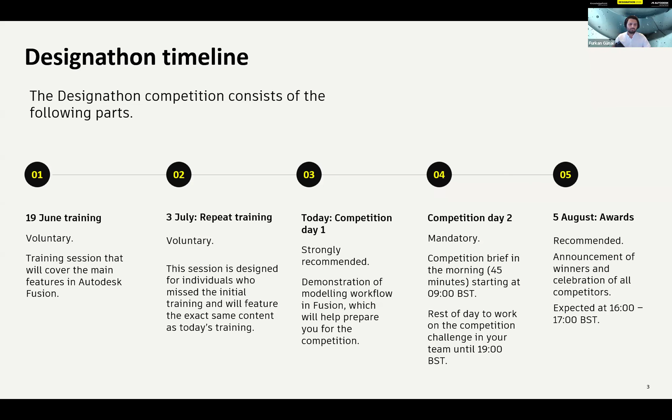After that, finally on the 5th of August, we will gather for the award ceremony and celebrate your amazing projects and announce the winners. So that's also one of the important days of the Designathon.

During the competition, we want to make sure you feel fully supported, so we are using several platforms. Discord is one, and I see most of you have already joined and been assigned to your private team channels. In these channels you can text, voice call, and share your screen with your teammates. The main purpose of Discord is to make it easier for you to collaborate with your teammates.

Other than collaborating with your teammates, please keep an eye on the announcement channel and support channel, because we will be sharing information and making our announcements through these channels. So please keep an eye on these as well.

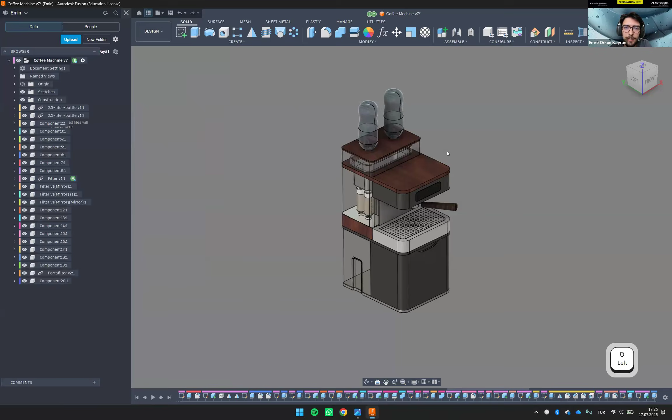If you take a look at it quickly, the models here might look similar because just a moment ago it's been shown to you. I will be using this as well by importing our main design, and the rest will be just basically designing from bottom to top design principle.

You don't have to stick very strictly to the design principles. You can just improvise. You're not expected to be very tidy with good product data management—you can just improvise on your own modeling.

Okay, so I will create a new design over here. For this one, I will be choosing hybrid design, where we're going to put a lot of components and combine all of them in just one model. That's why I'll be needing hybrid design, so I recommend you choose this tomorrow as well.

So we're going to create a new one, and we have—okay, let me open my grid. We have a blank design over here. The first thing I'll do is import the bottle design. You can go over here and open the data panel.

Then I will find the bottle design that we created before the session. You can either import and insert it from here as a derive, but the quick method is just to drag it—find it on your data panel and just drag it onto your design. This way, it's going to open over here.

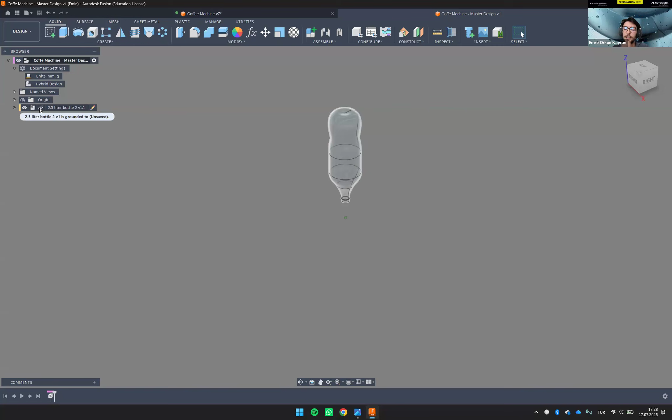Instead of doing this, I'll move it slightly to one side, then I can mirror it to the other side. You can see the icon over here with the chain—that means it's actually connected with the original design. But I'm not going to break it, I just want to move it.

So this is grounded right now, I need to move it. So I right click on that component and say unground from parent so I can move it. Right now we can see it's easily moving, but this isn't good because we need an exact position, right? Let me show you easily with that, where we're looking at.

So I'll again select Move Copy Tool, and change my object type to components since this is a component. It's good to select just one identical object over here and set your move type as free move—you can select the other ones either, that's fine, but for now it's easy to rotate and change around. I'll just slightly move it to one side, maybe 125. It's okay, then I say okay.

The next thing I can do is mirror it quickly so I can see the proportion and the overall design height. Okay, so it asks if I need to capture the position right now, because we've changed the position and it's not being saved over here. I say capture position—if you say revert position, it puts it back to the initial position, but we don't need this.

So basically, I will just cancel this. I say capture position. Once you do it, you're going to see in your timeline that a new icon has been created. This indicates basically that the position is being captured over here. Okay, so you can select components or bodies. If you say bodies, the same body will be stacked under the same folder, but I want components because I'm doing it one by one with each component.

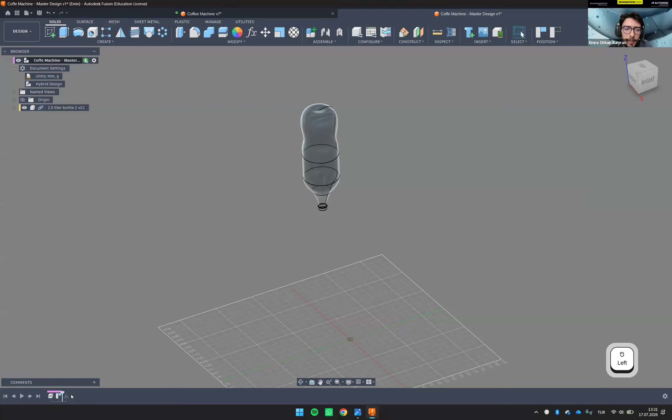All right, before you do this, I will just move it again. Select the object that you want to move. It was 150, I think, so I will just move it 50 millimeters. And then I will go over here. But I made a mistake over here again, because I should have captured the position, because it moves it back. Okay, let's do it again.

50. Then you see here the capture position icon. So that actually fixed my position. Now move it back. There we go. Okay, so the position looks okay. Quite nice. And the next thing will be basically just starting from the top and going until the bottom of the object. So there's a lid over here on the top, which I think puts the bottles in position.

To start with that, you can either create a plane, a construction plane that helps you to create your first sketch, or you can find a flat surface here where you can actually create the sketch and start with it. So for now, I will just hide my grid and zoom in, then you can actually find here there are some flat surfaces you can use. It's definitely up to you, but for now, since we're going to design it on a good principle, I'm going to use an offset plane.

And I will select one of those planes. It doesn't matter which one you're selecting. And then I will drag it up until I'm happy with the result. I think we can stop at 50. That's fine. Then that's going to be the helper plane, basically, an arbitrary plane we can use to create a sketch. Then I select it, and we will hit the create sketch button.

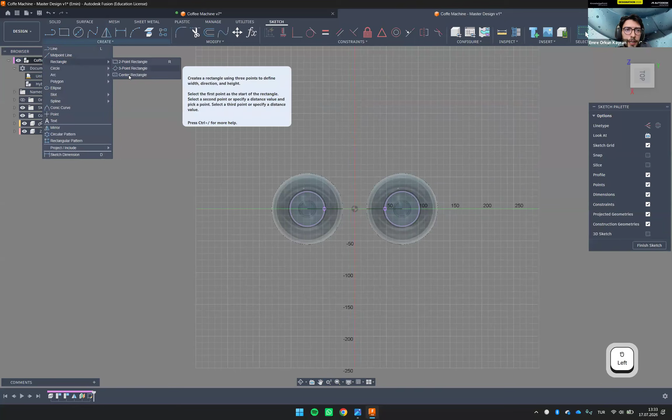So let's go to the rectangle and center rectangle. So let's make a rectangle something like this. Then I press D on my keyboard, or you can select it from here. That's going to give me a dimension tool. You can say maybe 320 by 180. Okay, that looks okay. Then we finish the sketch.

And you can see that the proportion is a bit different than ours, but it's fine. We don't have to stick exactly to this, because we did a similar one here. As you can see, this one is bigger also, but I'm just improvising and trying to show you how we can do it without any dimension or any reference image. You have to imagine it. So that's what I'm doing right now. Okay, anytime we can go back and change the sketch over here. Okay, let's go and say extrude.

I will give it a bit of thickness. 10 might be too big, maybe 5 is okay. And on the operation, instead of saying new body, I will be selecting new component this time. Okay, so each one is going to be stacked as components. I hit OK, and there we go. So we have a good surface here.

So to put it in a good shape, I will just add a chamfer here, maybe like 2 millimeters, so that we have a good inset over there. Cool. Okay, the next thing might be creating this glass, the plastic part that covers the whole body. So before I do it, I want to add some fillet in the corners. Over here, I'm just selecting them one by one, and you can apply it as you wish. I think 25 looks fine right now.

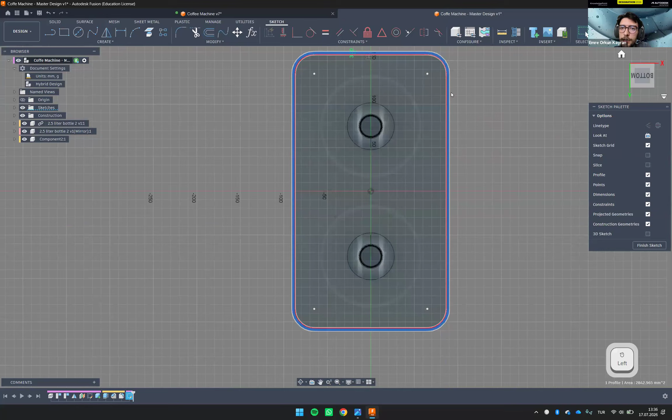Since the outer surface has already been defined, I don't have to project it because I created the sketch on the same surface. Then I press Finish Sketch. After that, all we have to do is just extrude it again. So you might wonder why I did it in 2 steps, because I want to create this as a new component. So we can keep it, I think, in 100.

Okay, to see through this object, you can easily go to the component. You can rename the components right now, but since we will have a bunch of different components, we can just leave it like that. But in your design, just to give a reference to your friends, to your teammates, you can just rename them. If you want to rename it, just right click on that and say rename. But for now, instead of doing this, we will change the opacity to maybe like 50% so that we can see through. This is not a material, okay? This is just an inspection tool for us.

Okay, so to put this one in a good shape, I'm going to make a lip that goes inside so that it's going to be more realistic. That's why I will create another sketch here. But this time, instead of giving the offset from the defined object, I'd like to show you something new, which we covered a lot in our previous sessions, the project tool. And I will be selecting the edges that I see here. So that's going to give me a 2D projection. Okay, so this is defined. Even though you hide your active component, you can see it there, which is very nice.

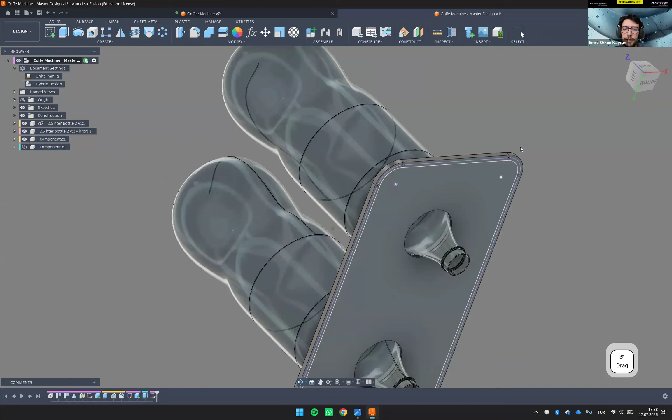And then I will offset this inside, like this, maybe, this is not minus, you can say 3. That defines the thickness of the lip. Then I finish sketch, then we can quickly extrude it. Okay. As you can see, it's more realistic right now. In real life, of course, you need to bring a bit of gap, but you can do it in your design as well. So this part is done. Let's check what we can do next.

Okay, we have a bucket here. I think it is basically to collect the dirty water from top and bring it to the filters. And also here, I think we have the pressure chamber, which basically pressurizes the water and puts it onto the espresso machine, which is the portafilter. We don't have to do the inside. We will just bring it as a solid part. But we have a wooden shape over there. It's basically connecting the bottom and top part together. So we can create it first.

Let's do it. I will create the sketch again. Once you find a clear surface, a flat surface also, you're good to create a sketch. This one is a good example for this. Then I select Create Sketch. There we go. And the next thing I will do will be, I will just continue on one of these vertices over here and just make a rectangle.

You can use the mirror tool over there, but I'd like to show you the constraints in Fusion. Remember to select the correct edges. So just to check this, you can rotate your camera and you can see that I picked the wrong one here. And I picked the wrong one here as well.

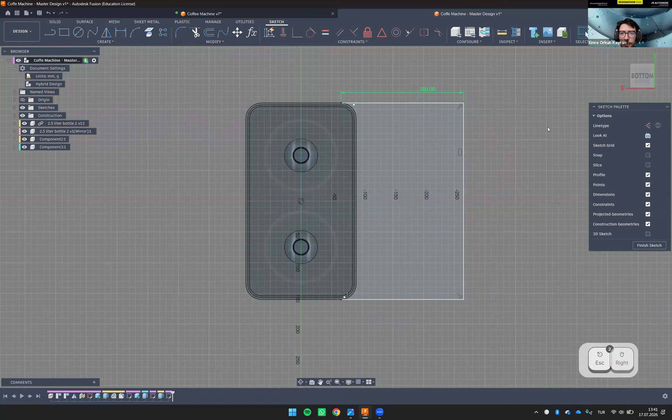So the first part will be selecting the perpendicular constraints for the corners. And lastly, we can give dimension. I press D on my keyboard and we can give maybe like 200. If the proportion is not good, we can always go back and change it. I think that's all. So I don't have to do anything here because I already have a defined plane. If you can see, when I hover my mouse there, it highlights the plane that I can extrude.

So I finish sketch, then I hit E on my keyboard. It's a shortcut for extrude. Then I will select both of them. Then we can convert it to solid. But instead of operation join, you need to select new component again. Okay, so that's good. We have the second part. And lastly, I will add a fillet here. Okay, let's keep it at 30. Cool. So far so good.

I think the next part might be this extra plastic part inside. I think that holds the tip of the bottles so that it stays in the correct place. So as you can see, that's a design challenge for us because our rotation is limited. Also, the manipulation tools are not very good here at this moment, but we can quickly fix it. We have a bunch of different methods to get through this issue.

You can either hide this component and create a sketch in 3D view. That's another method. But for now, I will just do it by creating a sketch in the plane that I want to create it in. Then I will go over it. So anytime, feel free to hide your bodies or change the opacity to see your image clearly. Okay, let's create a sketch here. You can see it's very difficult for me to see something from there. That's why I rotate my camera with my right click, and there I am.

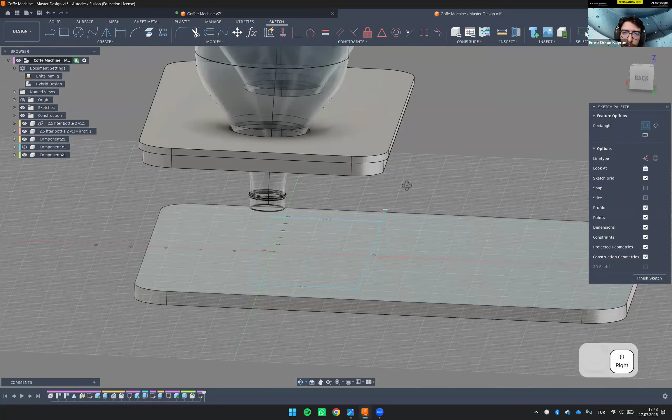Another issue is I don't know the border, right? If I create a rectangle here, just for reference, I don't know if it's connecting the border or not. I have no idea where it is. The first method is to just measure it and give dimension, but that's going to take a lot of time. The second one is to turn on the visibility of this component and take a reference from here, which I think is very useful. So go to create and select project include, project.

Okay, another hidden tool in Fusion which I really like to use. If you select this, you're going to see that it selects the plane closest to your cursor. But instead, I want to select the one inside. There's a very quick way to do it. Just press and hold your left click button, and you're going to see another feature here, which lets you see through. The second one is the face I'm looking for. So I click on that, then I hit OK. There we go. Now I have the reference. Okay, perfect.

So from here, we can just make a mirror line. Then I can make this a construction line so it's not going to affect my design. Honestly, right now I can also remove this so that I only see my reference images. I don't have to use all of them. I can just create one simple line so that it covers my bottles. Then I put this maybe like 130. The distance between the origin and the top flat surface is going to be maybe 120. But make sure that you connect these two.

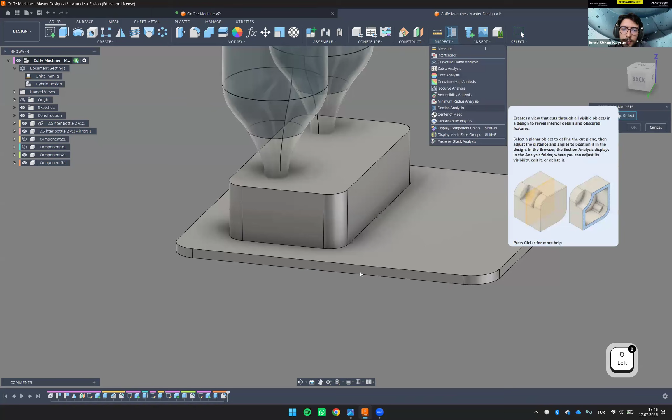Okay, let's drag it again. 20. So from now on, a lot of people have difficulties understanding why we did this. It's completely solid. If you want to check whether the inside is filled with material or not, you can go under Inspect and select Section Analysis. Then you can drag it and you can see it's completely filled with solid.

But the reason that I wanted to do this is I'm going to use a different command named shell. I go under Modify and I select Shell. Select the face where you want to create an opening. This one is the case. You can put here 2 millimeters, and there we go. I think at this moment, it's good to change the extrusion until the other side. I double click on the extrusion icon here so that I can edit it. Then here is okay.

Lastly, we will create the holes for the bottles. Then I press create sketch. I don't have to identify the circles again. I encourage you to use the project tool. Select the most outer edge you see here. Finish sketch, and then let's find our bodies. I hit extrude and quickly select it from there. Then I'm going to cut it.

But this is also cutting my bottles, so you can see that 2 of my bottles have been cut. But you can change the selection by changing the objects to cut, and you can disable body 2.5 liter. Okay, so we have the openings. The water can fill up here. Again, I will change the opacity for this. It's 50. And I can unhide my other bodies. Good.

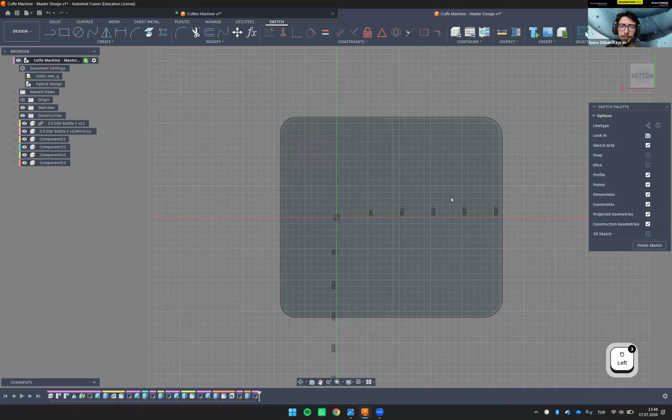Okay, cool. So the next thing, let me see here, the bucket. Let's do the bucket, and that's going to be the last part for my side, and I will hand over to Mehmet. To do this, I think we need to cut a good proportion here so that the water can actually fill over there. I will create another sketch over here to open the appropriate face. Again, I think you already understand my methodology. I always use references. So I'm going to hide this.

I will be using the project tool again. Okay, that's good, but it might be a bit difficult to select from here. That's why you can hide this body and select from inside. You can quickly select it by just clicking on the faces. And I hit OK. I got the reference. The next thing is quite simple. I don't have to do anything here. I just created a sketch to get the reference from there.

Extrude and just get rid of this extra part. Perfect. We have the opening. We can reach from here. But the last thing will be the bucket that is going to lead the water to the filters. So for this one, I'd like to show you another method. First thing, you can start from here. Basically create a sketch. Just get the reference over here by project include, just copying the face here.

I think I need to mention this at this point. The good thing about projection is whenever you change your previous actions, let's say you change the depth or the width of this rectangle, it's going to update as well. That's why I like to use it. You don't have to update it manually. Let's finish this. Then I'm going to extrude it down. But this time I will change to new component and I will give a taper angle so that it can lead the water at a good angle. Maybe -3 will be okay for us.

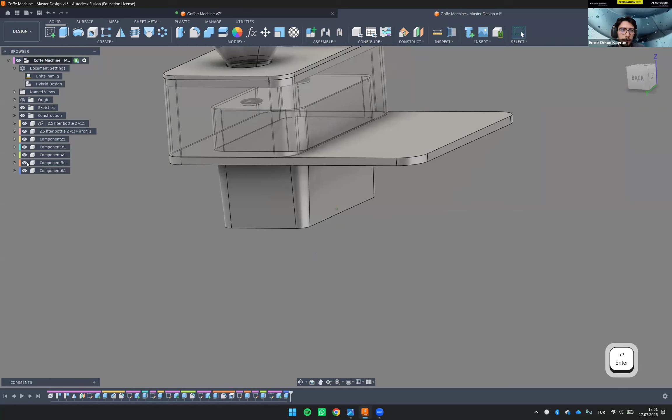That's good, but I will hide the extra parts. I think we can shell this as well, right? From the top, let's give 2 millimeters.

Checking the connections over here. Yeah, you can see that looks okay on this part, but I might need to extrude it inwards a bit. You don't have to create a sketch at this point, you can either use press pull or extrude, but in this case I'll use extrude. I just press E, and since this is already a defined surface, we can easily extrude it. Okay, that's it, so it's joined together as well.

If you want to make it more interesting, you can just enlarge this one, the inside acrylic glass, this one, component 5, and you can make a lip for the bucket, but that's up to you. Maybe we can put also a fillet here, just a small one.

As far as I can see in our reference image, there's an extra part here. As far as I imagine, they put the electronics, all the water pumps, the heaters, they're going to be here probably, for the cable output.

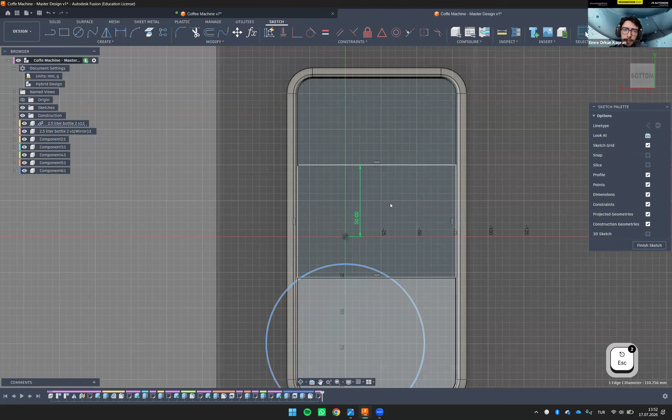So we can just put this and then it'll be done. We can just quickly add a simple rectangle, remember to connect the edges with the points. Then I press D, it's going to be 50 by... oops, it accidentally selected the circle on top. Maybe 50, if that's too big we can always change it. Honestly, I think that's okay, but Mehmet can also change it because we're using the same hub.

Then I press extrude, and that's going to be connected together. We can easily say that could be the same design we'll be using, and we can keep it as join because I want this to be one single body.

Let's add a fillet for this one, maybe a bit higher. Okay, that's it. I did this so you can actually see the limits for that goes down. Honestly, I think that's a bit too much, right? But as I said, we can always change it. That's not a big issue.

Okay, so from my side that's it for now. But Mehmet is going to be designing another interesting part. Okay, thank you guys.

Hello everyone. With the design, what we have left is first of all the filters. Emre designed the whole cases, but the inside of it, as you can see, there were 4 filters, and then we have the other parts of the machine. So we're going to continue with that. Just give me a second to share my screen.

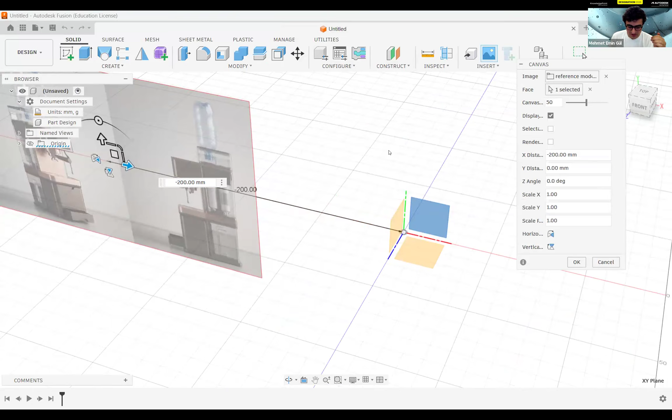I wanted to talk about it again, but I'm not going to model it on site. I just wanted to keep it there so I can look at it again and again. When I'm not looking at this, I can always turn off the canvas too, so keep that in mind.

So what I'm going to do right now is open Emre's file. I can access it because he saved it and we are in the same project. As you can see, we finished these parts and inserted the bottles and the container, the first water gets, and right now we are just at the filter section. So let's start with the filters.

As you know, Emre just modeled everything on it, but what I can also do is, while Emre can model with all this, I can open a new design as a part design or hybrid design. It doesn't matter because we will use this model afterwards in another file, the main file, where we will design the renders. Actually I have that file - design the filters. As you can see, we have a filter in here.

So what I'm going to do is, looking at the photos, the filter is more like a cylindrical shape. First thing I can do is create a cylinder, or I can manually create a sketch on it. So what I'm going to do is manually make a sketch.

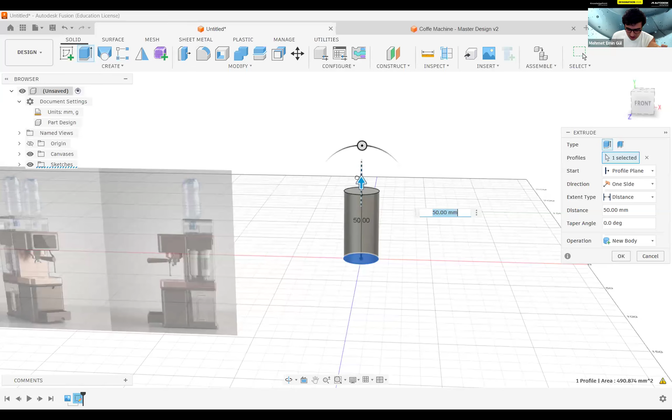So as you can see, I'm opening here, and right now I'm going to create a cylinder. The first thing to know is how long this should be, or the radius. So I'm going to continue with the diameter as 25, for example. When I'm saying finish sketch, I'm going to say extrude. When I'm saying the extrude command, it gives me the opportunity to extrude this however it requires.

So probably in here it should be more like... how much more? 50... 115, yeah, for example, in a part could be in here. It looks a bit long, so I'm going to keep it like that.

As you can see in here, we have lots of different materials in there, and also we have changing fillets. Also the inside material is different, and the connection part is different. So we will create all of these again and again.

So as you can see, what I have in here is we created the outer shell. I'm going to continue with this part. For example, what I'm seeing is there's a fillet in there, so I'm using the fillet command and adding a fillet. That looks similar. When I say okay, as you can see, after the fillet ends, the part goes like a lid - there's a lid part on it. So I'm continuing by adding an extrude command here too, and this will be our lid later.

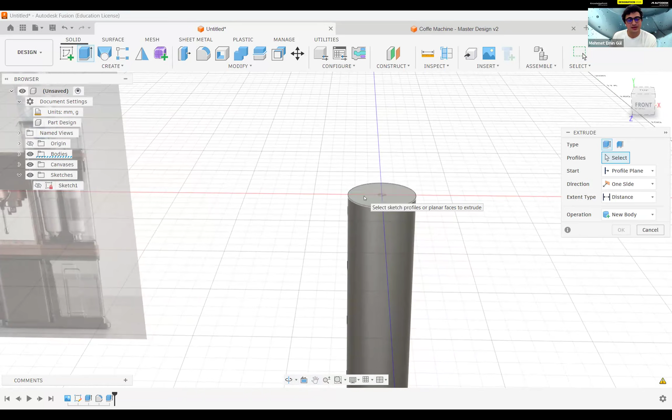When we create a sketch, we can use this to extrude. But what we can also do is, I can select this planar face and keep it. As you can see, I can add an extrusion here. But I can also not add any extrusion, and instead create a new body, which won't be the same body right now.

So for example, 5, as you know, it points directly. But what we can also add is taper angle. As you can see, it's getting smaller when it goes up. So I'm going to add that too.

As you can see, for example, it's enlarged. So what I should do is say -10. As you can see, it's getting smaller right now. Or, 10 is enough. When I say okay, here it is, and we can continue with that too.

As you can see, what do we have in here is this lid part too. As you can see, it goes upward and it connects with this coffee machine's parts.

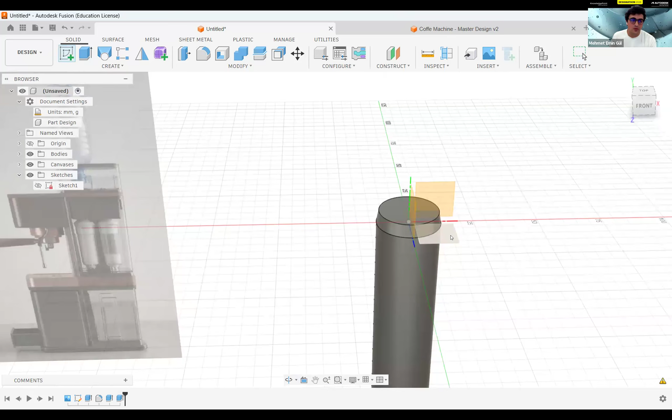So what can I do is create a new sketch. And as you know, we can use these XY, YZ planes too, but also for creating a sketch, we can use these planar faces too. So I'm using that and opening a new sketch.

Also, I'm selecting a center diameter circle. As you know, we just use this 0,0 point for creating all of the cylinders' center, so I'm going to use that again, so they would be in the same direction. I'm selecting it and just select and drag.

So what it can be also is, for example, 15. When I say okay, and after finishing the sketch, as you can see, I'm now using this sketch for extrusion. After saying okay, I'm going to use join right now because these two parts are in the same material, so they might be the same part too. So I'm going to continue with that.

And I'm saying okay. And as we can see, we have two bodies right now, and these are joined, these are the same body.

So in the reference image, what I'm seeing is it's not directly going upward. So what's happening is there's a small fillet in there, and I am using fillet to make that transition much more smoother. When I'm saying okay, as you can see, I created my upper connection part. So what I should do is continue with the other continuous parts, but as I did.

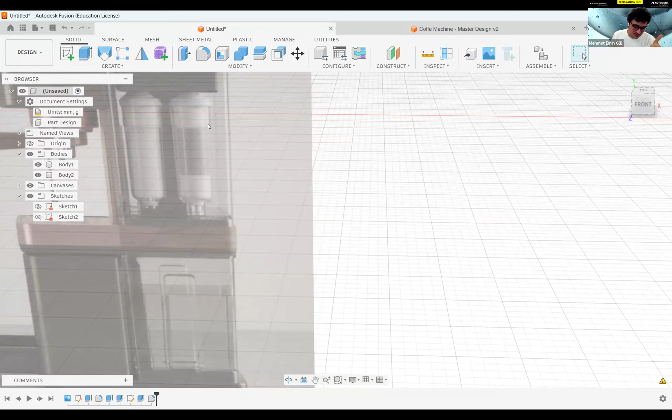So as you know, right now we are just seeing a material with nothing in it, it seems. But as we can see in here, there are some materials or other things inside of this glass. As you can see, we have a glass as a shell, and inside of it, the real filter is in it.

So what we are going to do is, as you can see, this part should be transparent, as we talked about before, about the appearances and materials. So how we can reach the materials section to give a material to that body.

I can go to design and render, and after that I can find appearance too. But as you can see, the shortcut of the appearance is A. So what I can do also is go back to design, I'm not going to take a render, I'm just giving a material to it. So I can use the A command, the appearance command in here too.

After clicking A, as you can see, my appearance library is showed up, and right now I can choose a material to give this body a soul, let's say. So after that, I'm going to choose the body. As you know, we said that it's transparent, like glass, so I'm choosing glass. There are three categories, like color, density, or smooth. What I'm going to use is this clear glass.

You can also directly click it if it's downloaded. If it's not, you can just click the download icon and give it time to download the material.

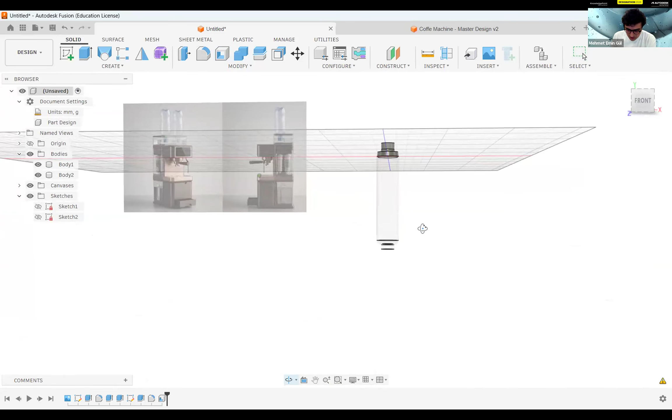As you can see, the inside of it is empty right now. This is the outer shell and this is the inner shell. So I can add materials in here. How can we do this?

The second question, let's go back to the reference image. We have this part, and as you can see here, we have that part with another material, and another material in here. So what I'm going to do is, for example, just add another material there.

I'm going to continue with it. As you can see also, just look here — but the inner shell is just the whole cavity inside of it. So I want to choose that for now.

How this is going to happen: as you can see, I couldn't select it easily right now. But on first selection, now it's clear and I can select it. Because it's empty, there's no material in here. So I can choose here too, but I'm going to continue quickly.

I can use the section analysis tool. After that, I can select here because of the section analysis — there's material inside that isn't showing right now. I'm adding a material in here, but as you can see, the glass continues.

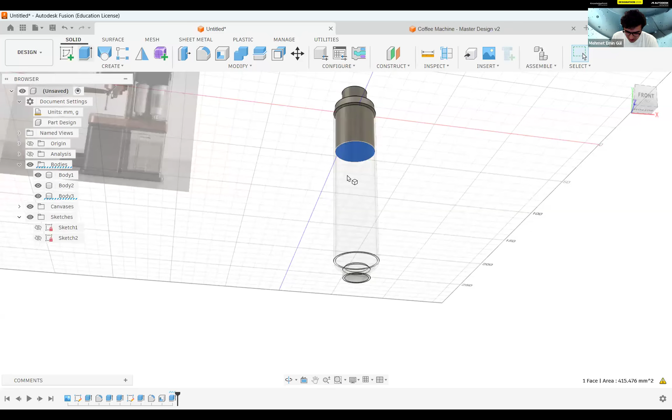Now I'm adding another material. As you can see, there are multiple materials like this. And when I'm saying go, but not join them — if you join them, as you know, they are touching inside, so when I say join, it joins everything. So I'm going to say this should be a new body.

I am directly going in here too, which will open. I'm going to talk about why we are doing this later. When I say okay, as you can see... oh, so we don't have an intersect in here.

So what I'm going to do is again create a shell, the same one millimeter, and I'm saying okay. But there's a small thing that appears here.

When I'm taking section analysis in here, I'm saying okay — as you know, we just closed up the section analysis. As you can see, it ends here. So we need to create a hole in here so they will be connected.

So what I'm going to do is select up to here, select this face, and cut it. After cutting it, as you can see, I'm closing the analysis tools. Yeah, it goes directly inside of it.

So what else? As you can see, normally in photos, in the real one, the filter keeps going with this radius too, so I need to do that too. But I need to remove the material — as you can see, these are at the same place, they overlap with another body.

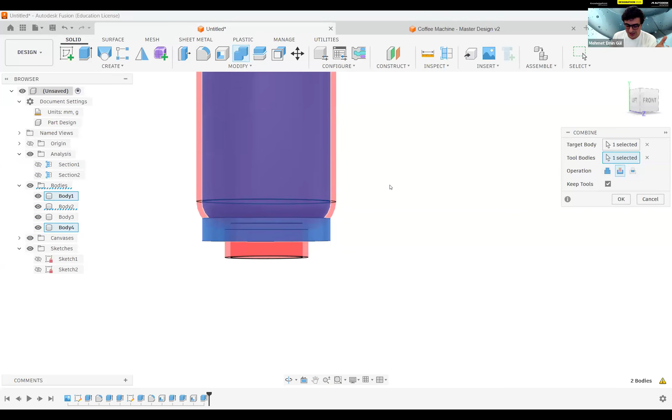As you can see, now it's red, but I want to keep that tool — I don't want to delete it. So I'm saying keep that outer shell because I'm going to use it later.

After saying okay, selecting this, as you can see, body 5 is this. I can also hide this. But what I can do is, if I don't need this part and don't want to crowd the bodies in here, I can just right click on it.

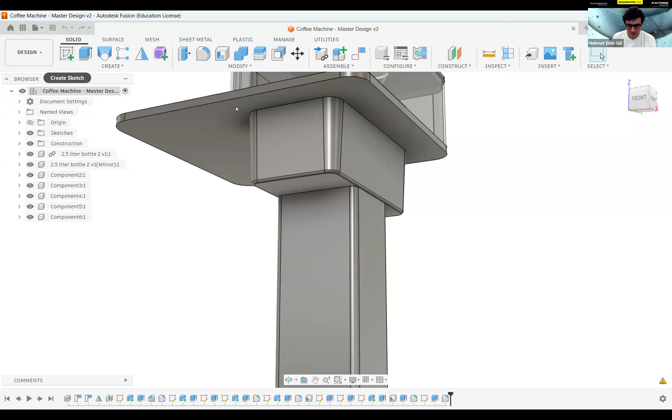After creating our filter and saving it, like filter, as you can see, I'm adding the same area in here. After saying yes, save it. It's saving. Now, in the next step, I'm going to import the filters in here. Let's see if it's okay, or if it's bigger or smaller, appropriate in here too.

So as you can see, this is just one part and I'm using that part. I can click and drag in here, and it comes directly. I can rotate it. But as you can see, this is the problem that you will probably face. Because as you know, we are not designing with exact millimeters, the different sizes can be normal in your case. So there are some options in here.

The first option is just going back and fixing the whole body itself, like components. But it's a bit small. Actually, it's enough, but for the height, it's a bit smaller. So what I can do is go back to the filter. I'm opening the filter again, and I'm going to fix it in here, like adding more in here.

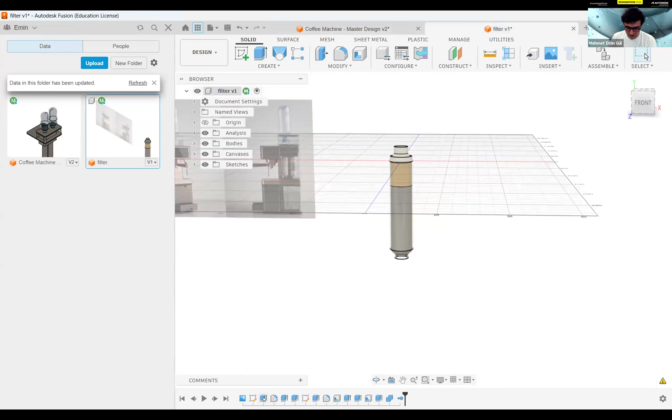So, as you know, I can just slice this part and add a new part in here. But what I also can do is, as you know, we have a timeline in here. So in the timeline, I can decide the sections again. So I probably need to double this up. Let me check it. Yeah, I can double it. It looks fine to me, doubling it. So going back to the filter, and it's in here. It's not 100. It can be 200.

As you can see, the problem is the inside of this cavity, the materials. What I'm going to do is the same right now. But I lost something, like the body in here. As you can see, we can see it right now. So this body. No, not that body. Sorry. This body. I'm going to edit this body too, directly. Keep that. As I just said, not join them.

That should be a new body. We were going to add them in here because, as you know, it's connected with the outer shell, so it tries to add itself on there. So I am going to cut these areas in here and in here. After cutting it, I'm saying to keep the tool. And right now, the target body is this, and the tool body is the shell. It will be overridden, but I'm going to cut it.

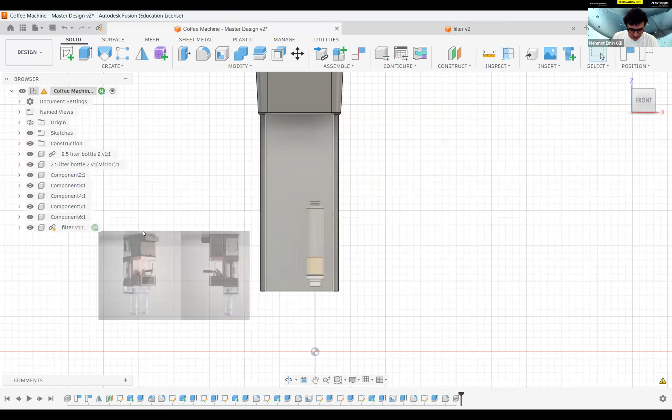So something different is going to happen right now. You will face this problem when you are working with your teammates. When one teammate changes the body, the system will say the component is out of date. Why? Because I just saved another version of it, and the old version is in here. So it asks me, do you want to get the latest version? And I'm saying, okay, let's get the latest version. Yeah, here it is, the new body in here.

What I'm going to do is just, as you can see, rotate it. And let's find a good place for it. Is it okay? I'm copying it in here. Yeah. When I'm saying that, it is okay. There should be some more area. Yeah, that would be okay.

After that, as you can see, I'm going to close this canvas. Cannot be changed, yes, because in here. So what I need is to place it here more freely. As you can see, it's connected with the older version, the main file. So I'm going to break this link and capture its position right now, and this body is going to be in this area. And after that, I'm going to close the canvas right now.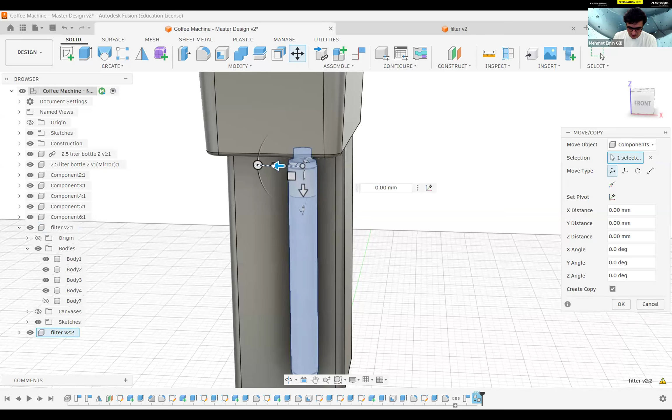As you can see, what I need to do is multiply this. So the first step is to select this body, all of it. As you can see, I'm selecting all of it right now. Create a copy. After creating a copy, I can manually move them according to my wishes. But as you know, I need two of them in here too.

So what I can also do is use a pattern command, something like in here, and select all of those bodies. As you can see, the objects are this, and this. The axis is, as you can see, this axis. Now, I'm going to create just two of it, setting the quantity. Yeah. And going back in here, applying the same in here. Yeah, that's it. There are three of it, but what I need is two. And I'm saying, okay, right now we have the filters.

So I'm going to continue with, where is our reference image? In here. So the outer shell we need is, as you can see, there is an outer shell in here, which keeps the whole bodies. But first, I'm going to create the division in here. As you can see in here, there's a division, the changing body, and in here the outer shell starts. So what I'm going to do is create a new body in here.

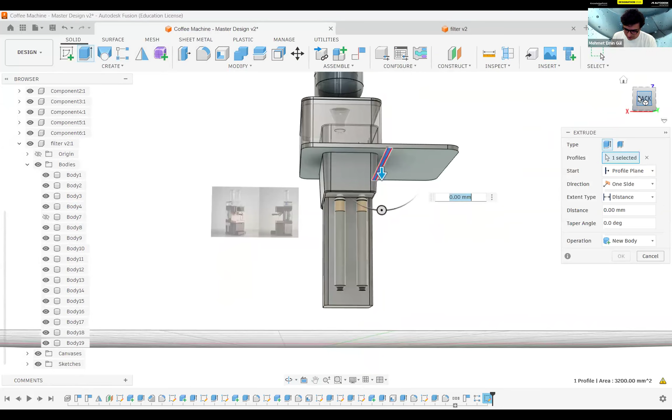So after that, I'm creating a rectangle. Yeah. And I'm saying, okay. After that, I am going to extrude it up to here. Not joining, it could be a new body. Yeah. And after that, that's it. So what do we have in here? It's the same actually. As you can see, it's quite similar to this area, and this area is the same rectangular shape. So I'm going to use that as a reference in here.

So I need to multiply this part now, but I'm going to do something different. Use extrude, choosing this body to extrude, and also the inside. No, it didn't work. So I'm going to use this same shape. For that, I'm going to create a sketch and choose this area. What I need is this area, as you know. So to be able to use this area in this sketch, I need to project its lines.

For projecting these edges to my sketch, I have a command: Create, Project/Include, Project. As you can see, I am selecting the sides right now. I could also select the face. I'm going to continue with the lines themselves. And I'm saying okay, and as you can see, right now I have the same shape in here. I projected it. After clicking finish sketch, as you can see in the model, what we have is, yeah, this height.

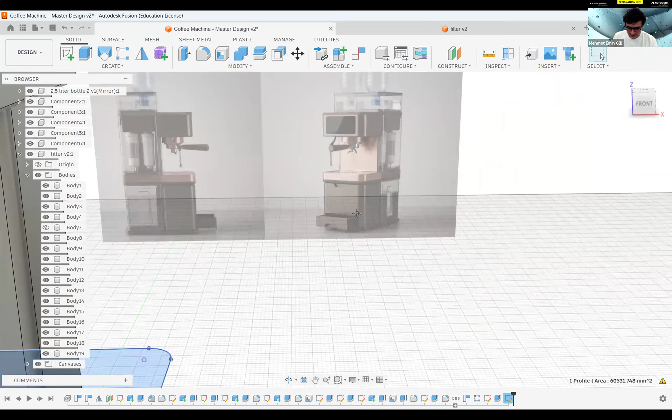I'm going to add a height on it, so it will connect it. So extrude command in here, just come up to here, like this, could be new body for now. Here it is. So also, as we can see in the model, we have an area to protect the faces, a shell. So I'm going to create a shell in here. I have a few options, but I'm going to use the easiest one.

I'm going to create a new sketch, opening this face, and as you can see, I'm going to use this, and yes, it should be. But as you can see, it doesn't allow me to select it. So to be sure, I'm selecting the same line. I'm going to project it again. As you can see, the project, and I'm saying okay. Now I'm choosing this and this. As you can see, it connects right now.

5 is enough. Sorry, my bad. I'm going to create a new sketch in here. And in here, it should be 5. After saying finish sketch, why I did this? I did this because I need to extrude it. I need to allow a cavity in here.

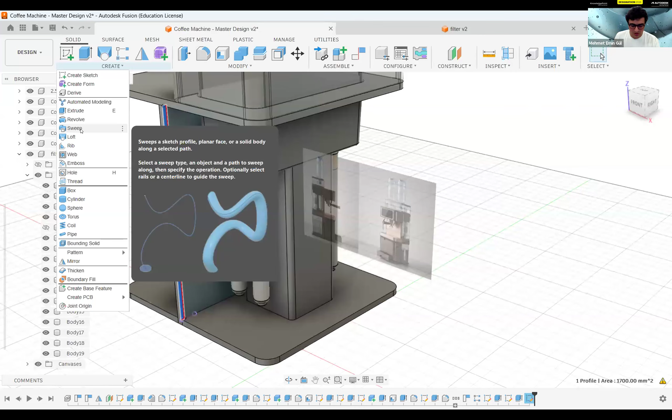So what I'm going to use for now is sweep. For sweep, as you know, we need a profile, which is going to be in here, and a path, which is going to be this line. As you can see, it created a pattern line. I'm going to give a different material to this, so I'm going to choose a new body when I'm saying okay. When I'm opening appearance again, I'm again adding a clear. So I created my first shell.

But as you can see, it's still not enough in here. So what I'm going to do is make this a bit larger too. In here, I have a few options. Keep in mind, if it's not affecting too much, you can try. Sorry, let's close the appearance section. What you can do is use the scale command. I'm going to select all of the bodies, as you can see, with all of the filters. When selecting everything, I can do uniform scale, which scales everything, but non-uniform scale is enough, if it's not creating something weird looking.

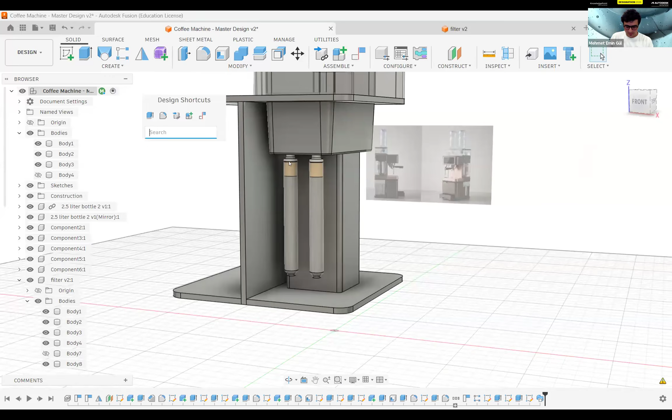As a Z scale, my point would be the upper side of it. Sorry. So what I'm going to scale, it will connect this area. I'm going to hide this body. After hiding it, what I'm going to do is scale command, and select everything on the scale area.

Saying non-uniform, selecting point, the starting point could be in here. And for the Z axis, this axis, no, not that one, sorry. This axis, I can play with that. So just for connecting it, 1.2 or 1.3 should be enough. No, it's quite large because it's a small area. 1.211. As you can see right now, it's okay.

You shouldn't overuse that because you're going to be working with different files, so you may lose the references. So you can add it like in here, or just use the uniform scale too. After that, as you can see, we have a different body in the bottom left, but it's a bit small. So I'm going to enlarge this area. After coming up to here, this area is quite different too. So I'm using this again.

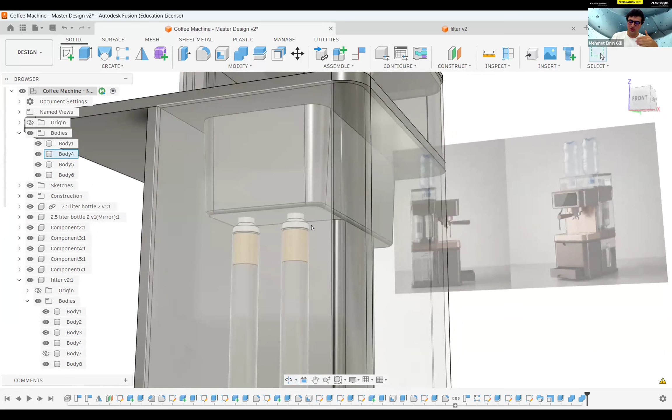No, not join them. Create a new body. I'm adding more material in here. 20 is enough. I'm going to combine this; it should be the same body. After the filter section, as you know, when we did this connection, there's no hole in here, so it's not connecting. I'm going to create a hole, so when water comes into this area, it can continue in here too.

So what I can do is, as you know, I have a section analysis, so I'm able to look at this area quite easily. As you can see, these are the bodies I created for it. And to combine, I'm cutting this area with these tools.

After deleting it, sorry, my bad. I need to say keep tools because I'm going to use these bodies too. After, as you can see, these are the not needed bodies, and I'm looking and deleting these areas by pressing V. Now we have a hole in here, and I can stop the analysis. And right now, what I need is, as you can see, an area with this too, so we have a water collection.

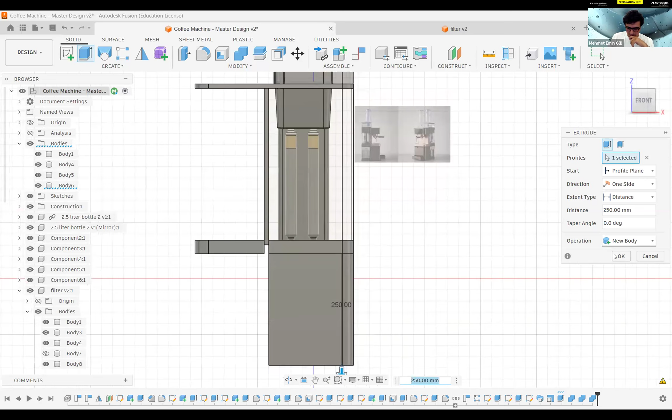This right now. So for that, I'm using this too. It's the same. I'm not going to use join. A new body is enough. So I'm keeping that the different area is enough. It looks the same, yeah. And after saying okay, we have a new body in here.

So what I'm going to do is, as you can see, we have the faces with points inside of it with this area. So I am going to create a sketch in here for these folding areas. It will grab the materials. As you can see, it doesn't go directly up. There's a small angle in here.

So right now I'm going to create, as you can see, it is 165 or 190. So I'm going to use the middle of it. Here's the middle as a reference point. This will be a reference. So I'm selecting this and making it a construction line. Also, I'm going to add an area in here. And also there's a small angle like this.

After adding this, actually it's a bit more in here, so I made it a bit middle. I'm going to place it up in here like this. It's quite easy in Fusion. But be careful when you click and drag this. If the distance is important, you're going to lose that distance. I'm acting freely, so it's not a big deal for me. So adding this point too, that small can be too.

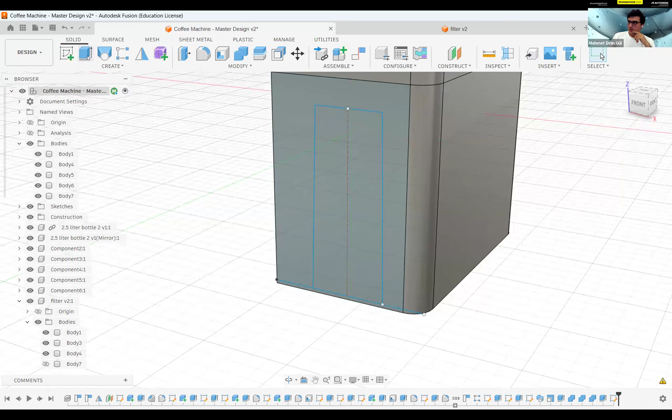After doing this, as you can see, I can mirror these 2 points using this construction line. And now I have a body, a new area in here. So using this, I'm creating this cavity, emptying this area. It shouldn't be that long, and when I say cut, it cuts it.

But what I need is the same in here too. So I need to mirror that action to here. I'm going to use the mirror command. As you know, we always mirrored bodies, faces, etc. But now we can mirror the features that we used. As you can see, we have a timeline, so I can use this extrude cut feature as an object. And as the mirror line, we use the same middle line, the X axis. When I say okay, it automatically goes in here too.

What I also need is, it looks quite sharp in here. Let's see the photo too. These can be smooth. So I'm using the fillet command in here. Now I'm giving a fillet, so this area will be quite smooth, as you can see.

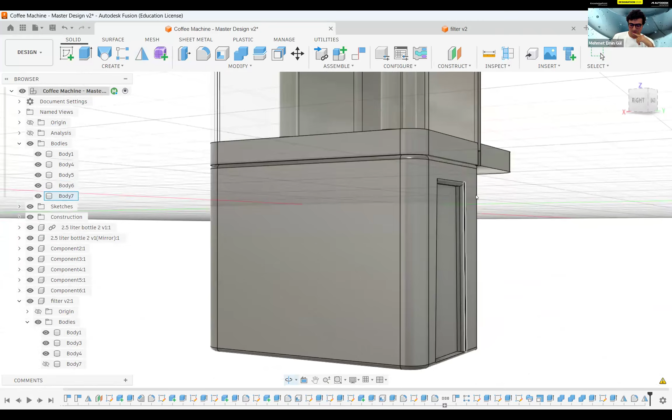So what else do we have left? We finished this area, but as you know, it's still full inside. What I need is an empty area in here because it's going to contain the water. So I'm going to create another shell in here. As you know, it should be glass later, so I click appearances and click acrylic clear. As you can see, it appears inside of it. Right now I need an open side on top of it.

So I'm going to choose the shell command. It's going to ask me to choose a shell area in here. When I do this, let's see if it's okay. No, sorry, I should have chosen the other side of it. In here, this body is not allowing me to access this face. So I'm hiding this body a bit, and now I can easily select the upper face. And I'm saying 1 millimeter, or sorry, 2 millimeters.

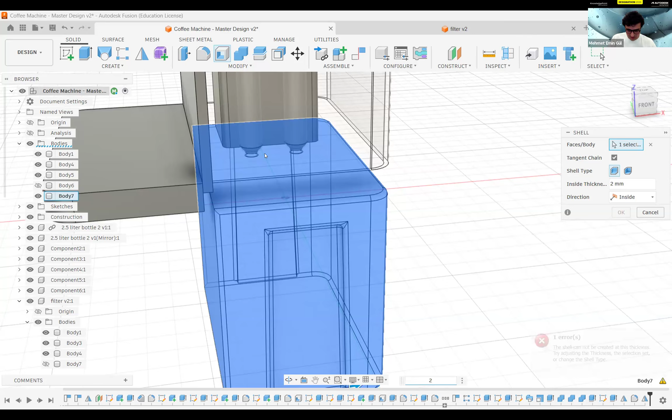As you know, the fillet is 5. Let's try right now the shell command. Now I can easily create a thickness inside of it. So that is enough.

As you can see right now, the difference is, I did 5 in here, but now I just did 2, so it should be to 5. So it will be going to the same material. I'm going to open the old one.

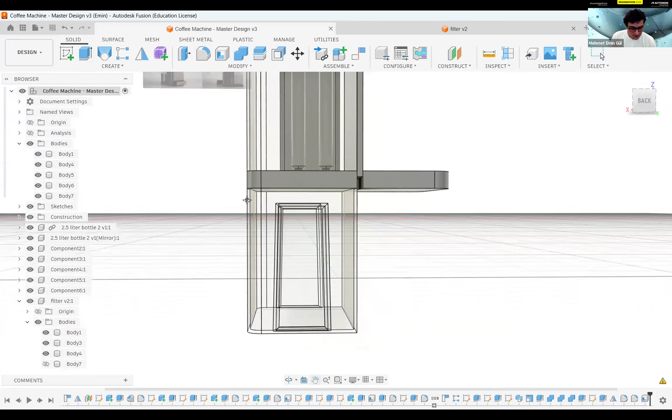Let's continue with it. As you can see, we finished half of it mostly. Just near the half, what's missing is the base of everything, the base side. So I'm going to now create the space.

I'm also going to see the model itself again. As you can see in here, the model is in here, and the material is changing in here too. So it's one body in here, but I made two bodies. So I'm going to add something different in here.

As you can see, I can create a new body. And what I can also do is combine all three of it. I also need a different area, a different part in here. So what I'm going to do is create an offset plane, which goes up to in here. And then I can say, but it's a bit too much.

So what I'm going to do is construction again. That's enough, like 10, yeah. And I will go and split that body. Splitting is just like slicing or cutting it with something as a reference, like a knife, let's say.

So what I'm going to do is create a new sketch on the bottom of it. After that, I'm going to use this as a reference. How do we use another plane as a reference, not like a side or face of a model? We can use the project command, and after this, as you can see, it projected - the purple line. But I need a bigger version of it, a bit bigger.

So we have an offset command in here, and I'm selecting this and saying that's a bit small, yeah, a bit small. And because we are going to add a bit of fillet, so let's say 10... 30, I don't know. So right now I'm going to finish sketch and use extrude command in here.

As you can see, I'm selecting everything. And for the distance, like it's more like, I don't know, 15. Yeah, 15 is good.

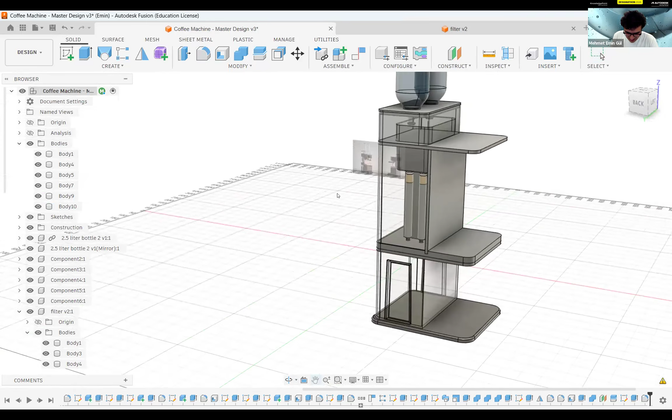So for right now, what we have left is these parts, and the front and the cup part in here. I am going to add this line, this area too. I forgot to open an area to connect these filters to that water tank.

So I'm going to open an area for them. I'm going to name this area as water tank. Just double click, yeah, as you can see, the base. I can't find a name for it, so it can just be the base right now.

I'm going to create an area in here, so I'm going to open a sketch in here. I used a lot of the project command because I need this area in here, as you know. So what I'm going to do is just close the body for now.

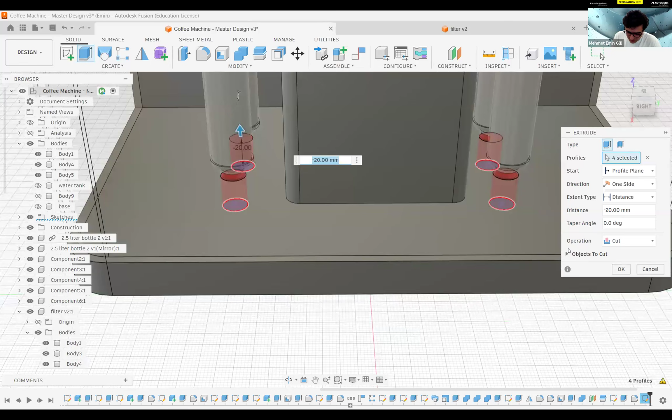As you can see right now, it's going directly, connected with the upper part of it. No, sorry, it should be a bit smaller. As you can see, it's directly going up to here. Yeah, 20.

It's empty right now. So what we have left is I'm going to open the hide areas, just hide it. I'm going to create the other container, or more easily, as you know, we just use a reference in here to create an area like that.

What I'm going to do is the same in here too. I'm just opening a sketch in here, and then create a 5mm. Because the chute is 5mm long, what I'm going to do is just click tab and say 5mm length of it, then say okay, enter it. As you can see, I have the body of it. So for my sweep references, it would be this, by the way.

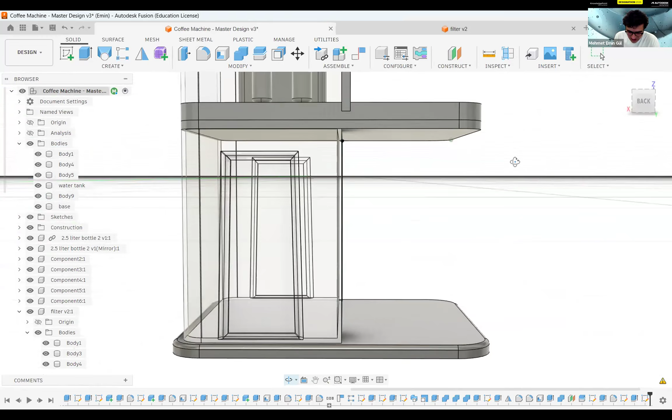But you're going to have a different problem in here. You will see when I say sweep this and this, as you can see, it's choosing all of it. So actually, I don't need to sweep it here. I wanted to use a different command because when sweeping it, as you can see, it goes all around.

But what I can do is just use this area as a reference because it's the same. And I'm saying use this area, but I don't want to use this line in here. So I am going to project this length. As you can see, I can now click it, and when I say extrude up to here, it can be a new body because there's a different material and it's a different body.

After finishing this, as you can see, I'm going to continue with adding details on it. So we have this area, it's a small drawer in here, so I'm going to create this drawer in here.

I'm going to say that I'll create a sketch on it, so I'm going to create a drawer, like, more like this. Yeah, that's enough, isn't it? Okay, for example. And after that, I'm going to duplicate this line in here. And now, as you can see, I created my drawer's area. Is it okay? Yes.

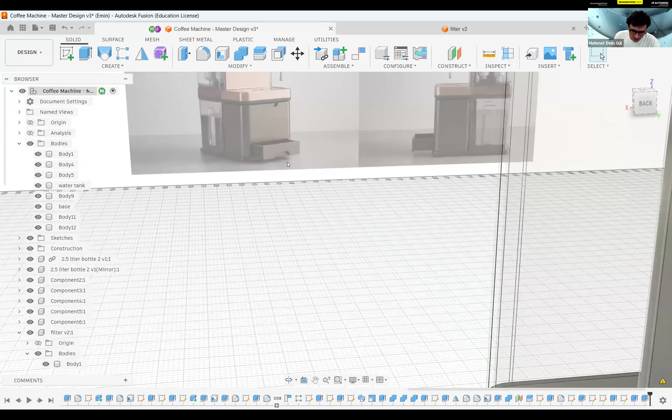As you can see, there's some details for grabbing it in here. I'm going to add a grabbing area in here. But for working more freely, I'm going to make a different acting here, and I'm going to take it out. As you can see, I just moved 300 millimeters.

I'm going to keep it in that line because later when I'm finished my work in here, I'm going to put it back. So when I'm saying okay, I am selecting this area and saying the grabbing area is near the middle, and there's some angles in here. I'm going to make it look like this, for now.

For example, in here. Also, then I'm going to fillet these with a bigger fillet, as you can see. When I'm saying okay, I'm going to mirror these lines, but don't forget to select - as you can see it's small, you may not see this small line, so don't forget what you used before.

When I'm mirroring, I need a reference mirror line, so I'm adding just a line for reference. To avoid confusion, I can make it a construction line. Now it's different looking. And now I'm selecting these three lines, the mirror line as this, and saying okay. As you can see, I created this.

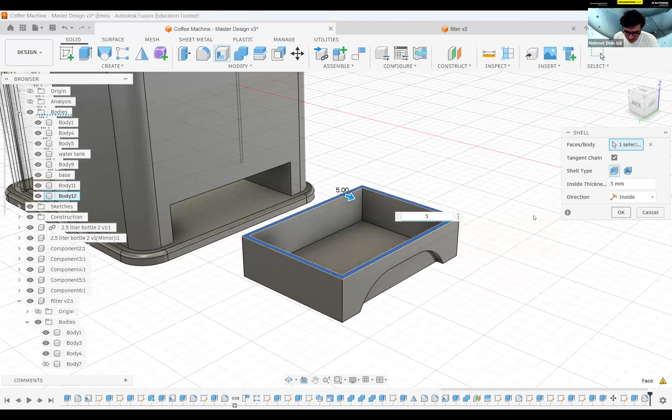5 millimeters is enough. So what I'm going to do is just put it back 300 millimeters, and yeah, here's how a drawer works. And as you can see, we have another gripping area, just the same as it. So what I'm going to do is...

Just using the same sketch in here. As you know, I just created a sketch to create it. So the last sketch, when I'm saying open it, as you can see here it is. So I am going to open it again. I'm going to just align this in.

I'm going to just mirror it in here, so I need to create a mirror line. But first I need to specify this line. When I'm projecting it, as you can see, this and this area is 250 millimeters.

Divide by 2 is, yeah, as you can see, 125 millimeters is the middle line that we will use as a mirror reference. So after that, I'm going to use the mirror command, just saying that the objects are these.

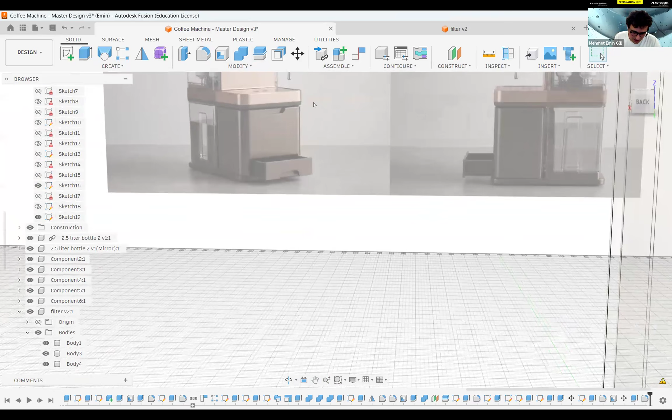But for now, what we have left is this screen, the coffee pot area - I don't know how should I say that - the area where we are putting our cup and handle.

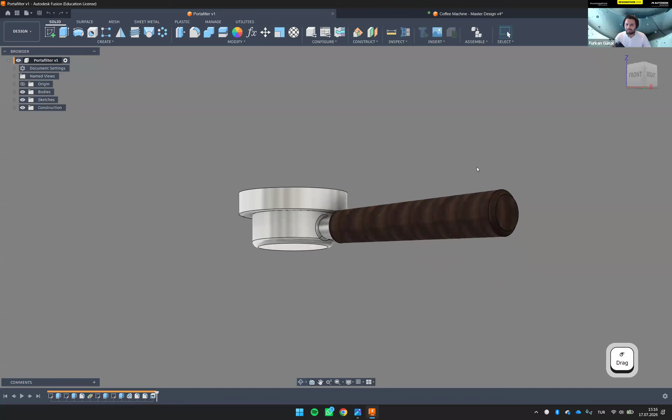Maybe we can show, as I said, this will always happen for new users. So when you import your friend's design into the final assembly, you'll see the scale is not matching, and that's normal. Let me tell you something: the first designathon I know happened in Turkey about 10 years ago, and we were asked to design a bicycle for 3 year olds. I was a student then, and I worked with my teammates, and the wheel I modeled ended up 10 times bigger than the bicycle itself. So that's totally normal.

Maybe we can show the students how we can import the model to the final assembly, break the link, and scale it right into the assembly model. That would be easier for them than scaling, saving, and refreshing the model repeatedly, since this will happen so many times tomorrow. I think that's a good way to foresee the problems that might come up.

So I'll do what Mr. Furkan said. All you have to do is save both of your designs, head over to the master assembly, and get your data panel. After that, all you do is drag it onto your design, and you can see that my design is slightly bigger than what he did.

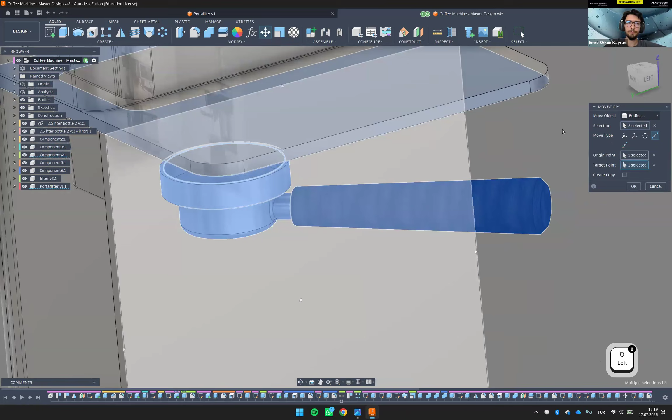Data hierarchy is very important here. The first thing I did was select it as a component, but that was the whole component stacking 3 different bodies beneath it. That's why you need to select them one by one, especially when importing from the other side. Just select them one by one as bodies. If that doesn't work, try to change the order here. You can definitely check if the link is broken or not.

Later, you can move back to free move, and you can see my axis is definitely not in a good position, but for now, just to see it, I'll put it in a random position. So the next thing might be scaling it quickly here, because this design right now, the portafilter, belongs to the master assembly. So the other one is not going to be affected. If you make a random change here, let's say, it's not going to be seen here anymore, okay?

Even though you save it, I will undo it right now. Okay, so let's quickly scale it. You can reach the scale feature under the modify tab right there. The entities I want to scale are just 3 of them, the bottom part and the handle. The point matters because this is going to be your reference. The point is basically the origin point where your scale is affecting.

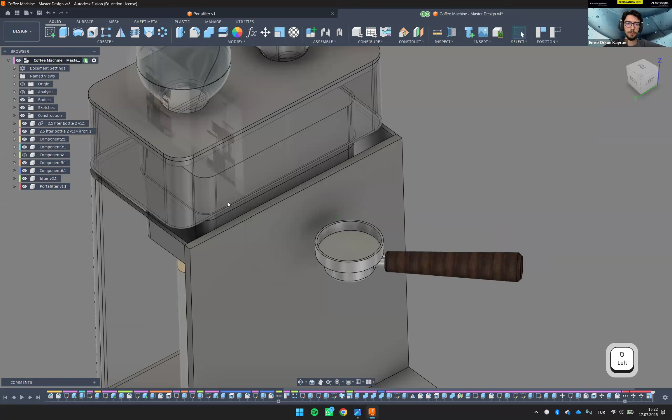It's definitely the same. So for now, let's make it slightly smaller. I will type here 0.8. So this one is now in the same design, but as a smaller feature. So we can quickly compare it. The inner diameter is right now 75.20, but this one is 94. Okay, so we slightly made it smaller and we can keep going on this.

From now, that's actually a very basic design, so to save it a bit quicker, we can just skip that. But the thing that I did here is very, very basic. I just created 2 cylinders on top of each other and added some fillets. In order to create a circle here, I created an offset plane, which is basically called a tangent plane right here. You can reach it under construct, tangent plane. After that, the rest is very simple. Create a circle, this is just for a connection, and the rest is basically creating the handle.

I saw a question in the chat box asking how I did the taper angle. I basically do it by using extrude. If you can see the arc over here, that basically allows you to adjust your taper angle, it's right here. Or you can reach it from this text box over here. So that's it. And the rest is basically adding some chamfers here, fillets in some places that need it, and shell for the top. That's it. So it includes just 3 bodies in the same design.

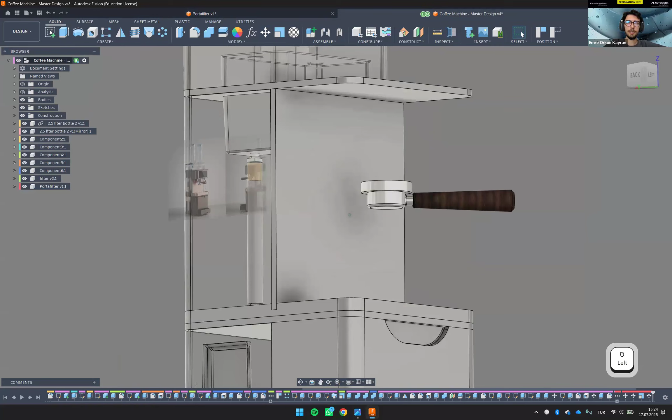But again, since I imported a new component, I need to capture the position or revert the position. If you say revert the position, that's going to put it back to the initial location where you first imported it. But for now, I'm happy with the location, so I will say capture position, and it's going to keep it here. Okay, so again, I rotated my camera just to see it a bit clearly, and I need to take a reference from this line.

I think we've used it over 10 times today. Project, include, project is a very quick tool where you can take references for 2D sketches. And the geometry is over here. That's it. If you want to add some extra tolerance between the 2 of them, you can just bring a slight gap between them. But for now, I think it's not necessary. Finish sketch. And then just extrude it. But remember to keep it as a new body or new component. It doesn't matter which one you're selecting.

Mehmet was usually using the new body, which is completely okay. And in this way, you've seen both design principles. I will keep it as a new component. There is definitely no big difference at this moment. You don't have to be confused. You can go either new body or new component. The only difference is they will be stacked in a different orientation over here. Okay. So let's say okay on this, and the new component is right here.

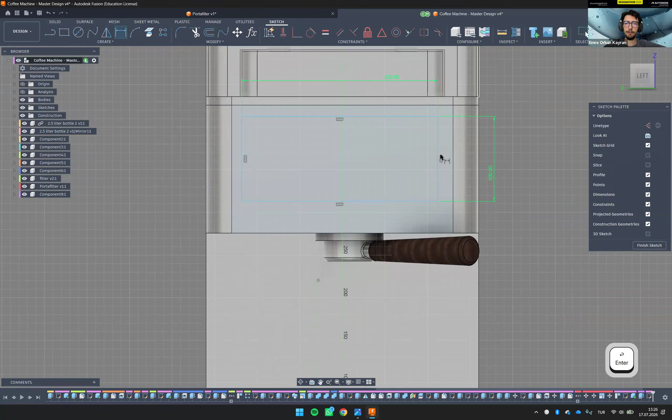And of course, we need the location, right? Because this one is right now under constraint. I press D again. The only thing I should do is I need to pick an exact location that I can take a reference for, which is for now, origin is a good point.

So again, a reminder, Fusion can make mathematical operations in the text box. I can type here 230 divided by 2. So that's going to keep it in this position. And for here, I can take this reference, maybe 30. Yes. Okay. And right now, I think I can extrude it.

I need to make a space for the screen. Maybe that's too much. Okay. Again, we can put some fillets right there, here, and here in 4 corners. Okay. Next thing, create a sketch on this extra face over there.

Just to put a good depth in between them, I will just offset this inside. You can go under modify, offset, select the edge, and put it inwards, like maybe -2 millimeters. Finish sketch, and then we can press extrude and up until here.

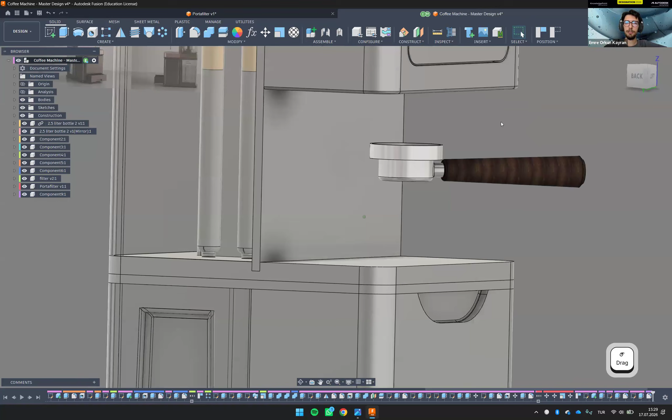For now, I can just leave it here because eventually I will put this in the proper location. So I say capture position so that it's going to be there. Whenever I move it, it's going to go back to the saved position. Okay, so let's create a sketch here.

And there we go. So the only thing I need to know right now is the diameter of this cylinder so that I can use it as this one. But it's definitely okay. If you don't want to deal with these dimensions, you can always scale and try to fit it. Basically, the method doesn't matter. So for now, I can quickly look at this. It has 80 millimeters. You can look at the right and bottom corner. It shows you the dimensions.

I'm not going to use the projection because I have no idea about the location. It could be correct or wrong. So I will do it manually. I press C on my keyboard to get the circle tool. Okay, so the 80 is the outer diameter, right? So we need to make it a bit larger just to fit it inside. Maybe like 90.

And then we can create a line just in between them. And I will make it construction so that it's not going to divide my section in the middle. Then I will drag it on there so that it snaps and it's going to stay there. And after that, I will select both the construction line and the point by holding my control key. Then I will go constraints, and we say midpoint. So that's going to put this in the middle. Okay, that's a very good constraint tool you can use in your design.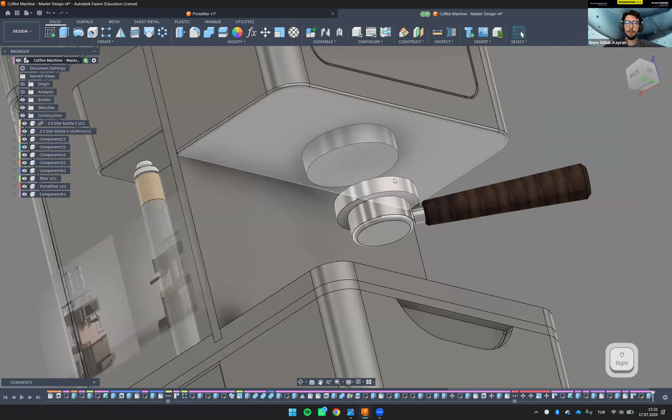Let's say finish sketch, and we're going to extrude it. Okay, so it could be joined, but if you're going to add a different material on it, always having a separate body is easier. So you can keep it as new body. Okay. Then lastly, I will create an inset for this one so that it can fit inside. But at this point, I think I need to know the depth.

So you can go in the measure tool, select two faces that you want to measure. It says 60. Oh, sorry. Let's check quickly. Yeah, it says 16 over here. And by doing this, you will be able to find out how deep you want to put this inside. Again, create sketch.

It's going to be 80, right? Of course, I'm repeating again, in real life no tolerance is a mistake, but for now, we're just making a preliminary design, so it doesn't have to be exact. Put here 80.

Then I hit E on my keyboard for extrude just to cut this. I think -15 or 10 is okay because I don't want to put this fully inside.

Okay, so last but not least, we're going to use the move copy tool again. And this time, make sure you select the bodies and then change it to point. We're going to match the centers. This one or this one, it doesn't matter. This, and the target point is right here, so it moves it correctly. Then you can quickly put it inside as you wish.

Okay, that's it. It looks cool. All right, so this part is quite okay for me. Let's check if we need to do anything else. I don't think so. We can do the bottom where the water and the other stuff like the spills can go here. Yeah, maybe the drainage can be over here. Model a grid there. The grip, you mean? No, the grid. The grid, yeah, sure. Exactly. That's what I'll do.

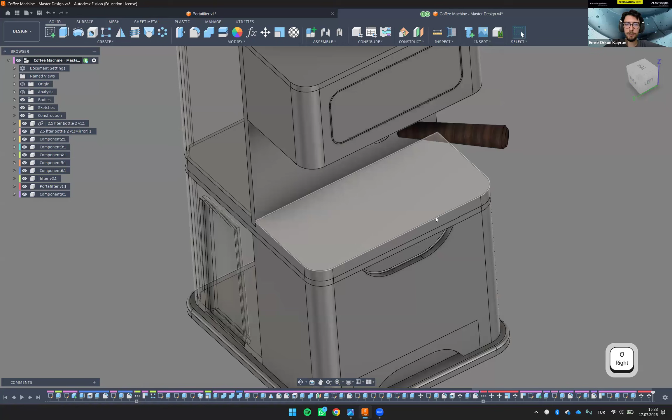Okay. Great. So to do it, we can use the same space Mehmet created, or we can do an extended version here. It's definitely up to you. But for now, I think that space is quite enough. I create the sketch over here, and then I will put an offset, maybe like -10. I think it's okay. Then we can create an extrusion, maybe -10, or that might be too big. Yeah, -5.

Okay, so that was actually for the bottom part, but we need an extra plate here. It's just maybe a thin plate where it holds the solids or the other stuff that doesn't have to go down, basically for liquids. I create a sketch here again. One more time, I'm saying that just to create a slight depth, and it's going to look better in render. I will put another offset here, but that's going to be slightly lower, like -2.

Okay, finish sketch, and then extrude it until here. We don't have to use join for this one. That can be a separate body. I put a new body over here. There we go. And for the holes on there, Fusion has a beautiful feature. Actually, you can use it if you use a student license.

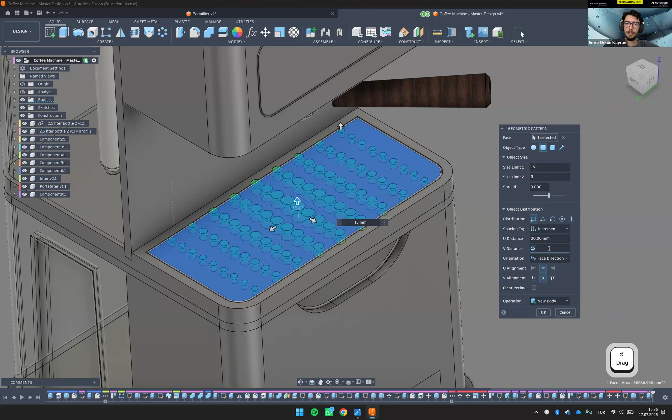You can change the distribution for something like this, if you're looking for a different shape, that's always okay. The distance over here is basically indicating the things that you do here. You can always change them. U and V define the directions. Let's say if you make it 15, it's going to change it along this distance. I think the more you decrease it, the circles might get close to each other. So it's better to keep it balanced.

Something like this. The U distance is similar, but in a different direction. I think we can slightly increase that until we find the sweet spot. Yeah, I think it looks okay. Once you change the operation to cut and say okay, that's going to cut it. By playing with this, if you spend some time, you're going to find the best spot. I know it doesn't look very aesthetic right now, but you can definitely find the best alignment for you.

Okay, so for now, let me see what else we can do, if there's anything left.

I guess it's pretty much done. We have almost 20 minutes, and Mehmet is going to make the render part. This part is actually quite important because that's the time that you're going to learn how to upload your final design, which we showed two times before, but it's okay. You can take a look at how you're going to attach material and send us your rendered file.

Okay, so I think I can stop here. Yeah. Emre, thank you. And maybe after Mehmet shows how you can assign materials, I can also show how you can use McMaster components, how you can include in your design some fasteners like bolts, nuts, etc. And we can finalize the modeling training.

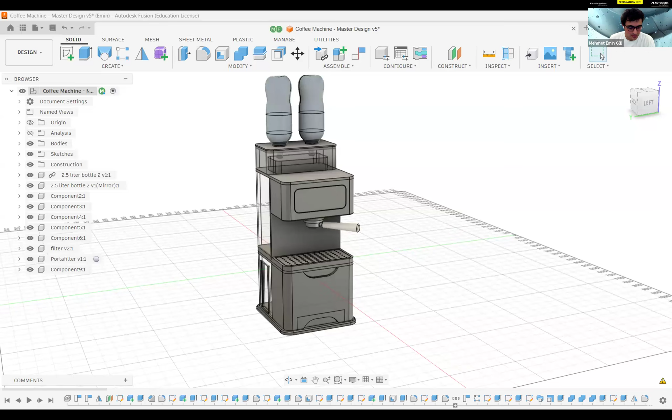No problem. So the next step is giving appearances to our models, giving materials to it. Actually, I just showed a bit at the filter section, but now we're going to go deeper on that. First, what we need to do is go back to the render section. As you can see here, we have design, generative design, etc., and the render section. Let me, oh, sorry. I'm going to share my screen again.

Okay. As you can see here, in the render section, we have appearance. So here, we're going to give some appearances to our design. I'm going to open this area, and start to give some materials. For example, this looks like rose gold, I think, and metallic looking. So I'm going to find the metals. Here it should be maybe aluminum. When looking at it, you can find a near or identical material here, but it doesn't always happen.

Some materials are editable, by the way. For example, I said it looks like aluminum, anodized glossy maybe. When I'm downloading it, I can right click it and say edit. In the edit panel, as you can see, there are the color appearances. So I can select a color for it, for example something like this. As you can see, it's changed. And now I am adding the appearance, the material, here.

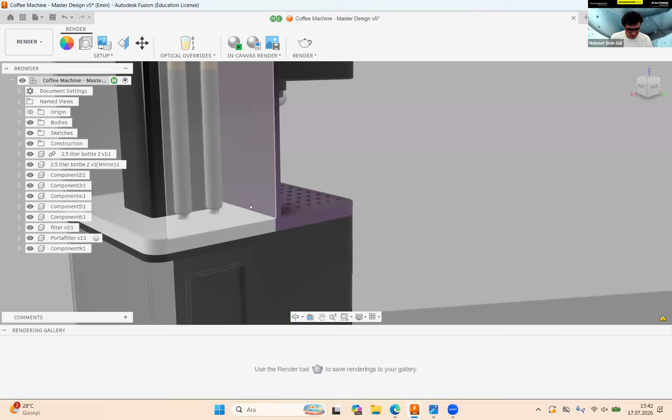Sorry. Why it's white, I don't know. I probably just downloaded the wrong one. I'm going back again to find it. Where is the wood? This looks like dark bamboo, semi gloss. I'm adding the material here. As you can see, it automatically appears. I'm going to give more materials.

Here the top is also wood, and here is also wood. So let's go with this material. Actually, it looks a bit dark here. We're going to fix that. Is it walnut? Let's give walnut here too. So I'm continuing, giving materials just by looking at it. Let's create a material that looks more like this. It's actually a metal, but brownish. It looks like a metal to me. Let's give a metal.

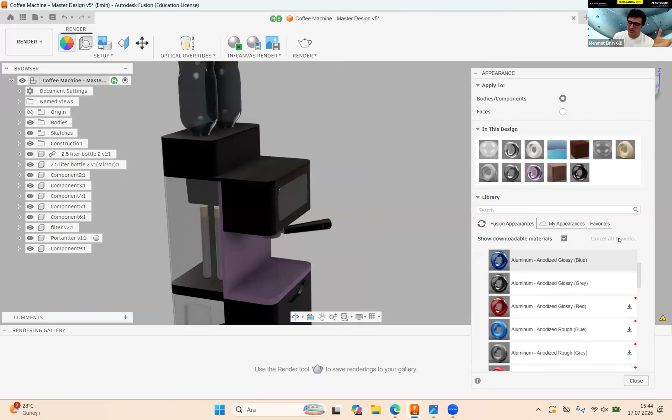So for now, let's say that it's okay. We can add more materials, it's up to you. So when you're editing materials, giving materials to the design, after that, what you can see...

In here, when I'm saying close, there is a scene settings in here, which is actually the render area. So we have a scene at the background which surrounds your design, a much more meaningful area which helps us see much more details about your design. So in here we have scene settings. For example, we can add some light in here. Also, here's the environment settings.

As you know, we have a position in here which changes the position of the light, as you can see. So what's important is you need to adjust these sections, for example if you wanted to make this area important. But if you keep the light just behind it, when it's all dark, your design becomes not meaningful, and you're not helping others when they look at your beautiful designs. The details may be lost. So just use the slide command according to your needs. After that, you can add some brightness, but if you add more, it looks like this. So the 2-3K looks enough to me for now.

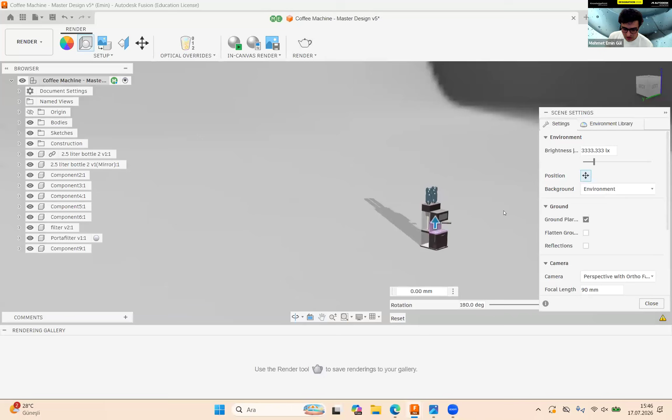Also, what do I have is background. This is important, we have two background selections. First is environment. As you can see, the environment is now a solid color. When I'm saying environment, I have an environment library, like in here, as you can see. After that, selecting this, we have some environments.

For example, let's say, maybe try lake bed. I'm downloading it, and when I'm selecting it, here it is. As you can see, the background just adapts. So for example, if you have a bicycle in this city, you can select plaza and add a bicycle in here.

Also, what we have in here is, so we should see. Also you can select solid color and add another color which helps us see your details a bit easier.

Also, what we can change in here is the ground plane. We have a ground plane in here. And after that, if the ground is something like reflective materials, you can select reflection and change the roughness of it. Or you can say flatten ground in here, so you can place your design in here. For example, we're going to keep, come to that now.

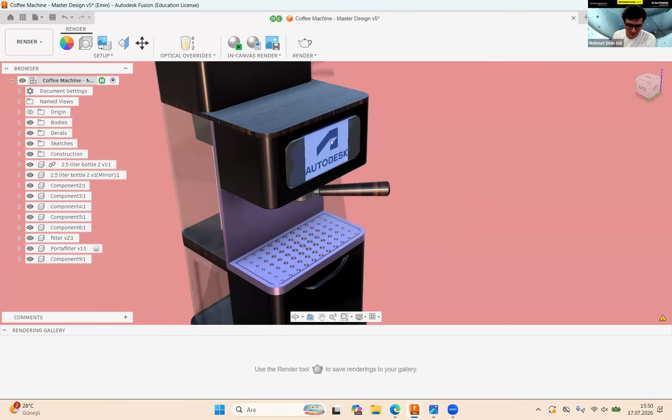For example, right now, as you can see, I'm adding the screen. I'm enlarging it also on this side. So in here, you can add more details with decal. It's also like, looks like a sticker, as I said just before. But also what you can do is, for example, flip this image, a logo. Also Fusion automatically adapts the photography according to the design's faces. As you can see, there is a fillet in here and the photograph just adapts itself. So it's possible in Fusion too.

In here also, let's keep it quite enough for the competition. Of course, you can dive in by yourself whenever you want. Also, in here, the taking renders selection, as you can see here, we have a render. When I click it, we have some options, the sizes, etc. But also Fusion has an option that you can ask the cloud to take your renders.

For example, your computer is full of work and you don't have to use your own power for the render—you can ask the cloud for it. Since you have a student license, you have unlimited credits for taking renders. Let me send a render to the cloud.

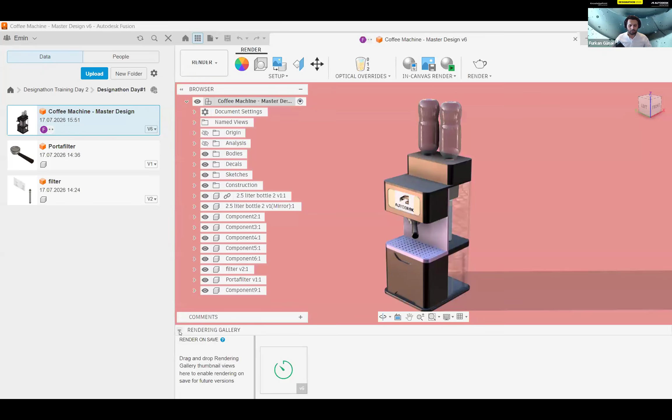By the way, that's the great thing with Fusion—since it's cloud-based, we don't have to be in the same room. We're not even living in the same city or country. That's the great way to use Fusion and cloud technology. Fusion offers so many things with this cloud technology—I have to add this.

As you can see, I'm sharing my screen and showing the design with materials assigned. Maybe I can add one thing about decals: it would be better if you used images that have a transparent background, so you won't see the white background like we are seeing right now. That's a great way to use decals in Fusion, and it will increase the detail level of your design, right?

So let me go back to the design section—you are seeing our model. I need to say it's a rule to use Fusion for everything in this competition. You need to create your design from scratch in Fusion. You can't use models you prepared before the competition, and you can't use 3D models from different websites or the internet. Of course, you can use the internet for research purposes, but you need to do everything in Fusion.

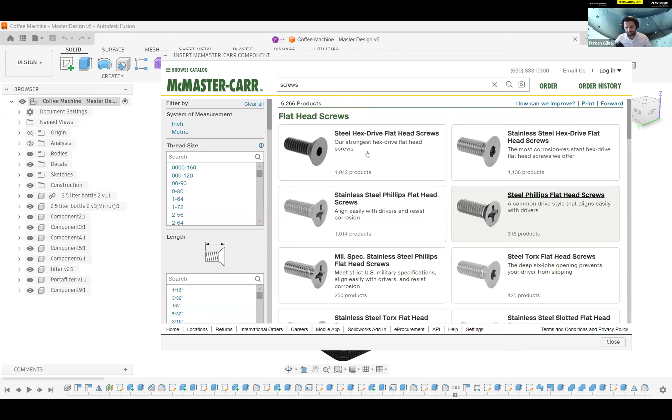It's super straightforward. Let's say we want to include a bolt or screw in this design. Let me make this screen bigger so you should see more. Let's say flat head, steel hex drive, flat head, etc., and you will see a list with dimensions. You can continue with the one that fits your design, or filter the outcomes through the panel on the left—say we're using the metric system for this design, and you can select the length of the screw, or search for it.

Let's say we have a screw with head diameter of 10 millimeter. Let's give it a try. After you clicked one of the listed 3D models, you can select 3D step here, and right after you click download, Fusion automatically gets that model for you.

As you can see, now we have a screw detail in our design. We are not expecting you to create a model that works perfectly in physical life, because we have only one day and there's not enough time for that. But we will reveal the criteria and everything tomorrow. You will see that your designs need to include details, and that's one of the ways the jury judges your design.

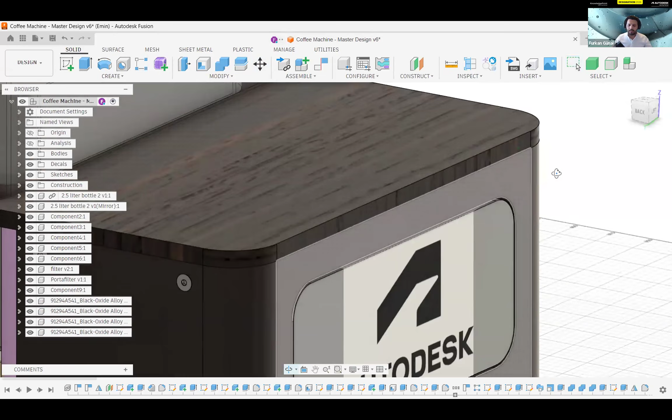And I started adding details to this design. This is important because it will make your design look better. You also need to apply fillets or chamfers to your design because this also increases your detail level, as you can see here.

I'm seeing so many sharp edges, so just pressing F from my keyboard - this is the shortcut for fillet. As soon as you apply fillets, you will see that your design looks even better, and it's the same for design workspace and rendering workspace.

Let's check the render workspace. You can see the edges are looking even better, and that's important because tomorrow maybe I can cover this part as well. Tomorrow we will be asking you to create a link with your final design, and you will be sharing the link with us.

For this, you will see a file icon here. I'll pause for a few seconds, and you will see the share file link option here. When you click the link or the comment, Fusion gives you some options like share the latest version with anyone using this link. You need to activate this, and Fusion automatically makes the item downloadable, and you will see a link here. That's the link you will be sharing with us tomorrow.

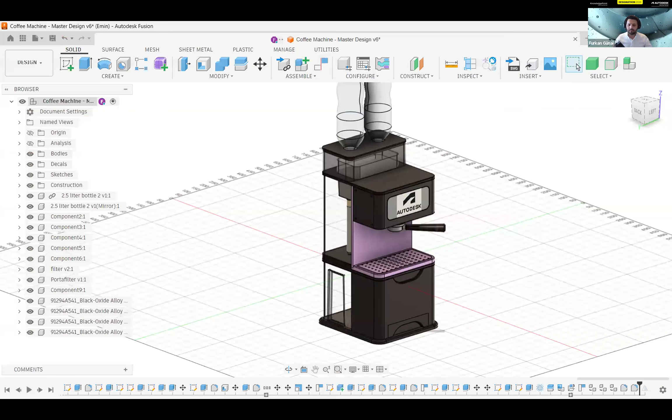Let's say I open Fusion again, and I will do some change on the scene. What I can do is use environment, and let's activate the flatten ground option, close. And I want to do a slight change on the color of this material, to be honest, because it's pink right now.

I get that it's kind of hard to get that exact color. Let's say this one is better, right? So when I save this, let's open the link I created again, and when I press F5 for refreshing it, it will update the link for us. Let's wait for a while.